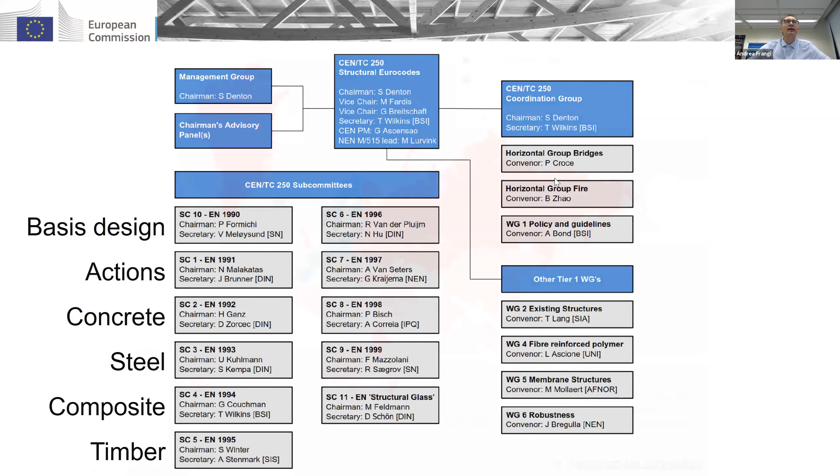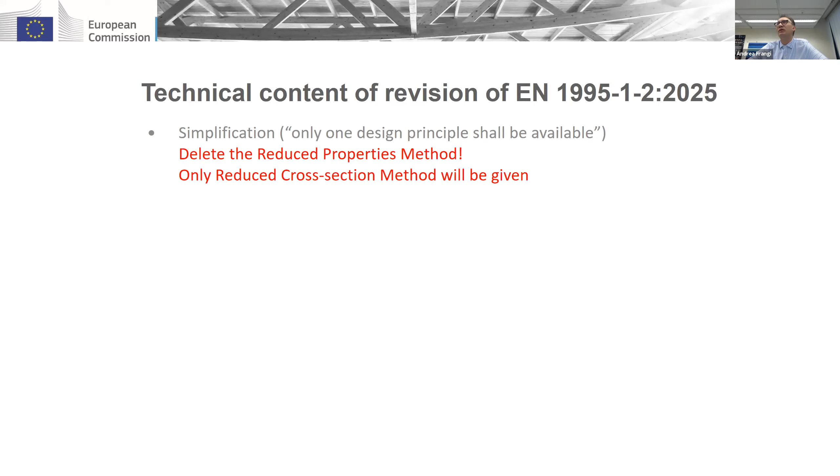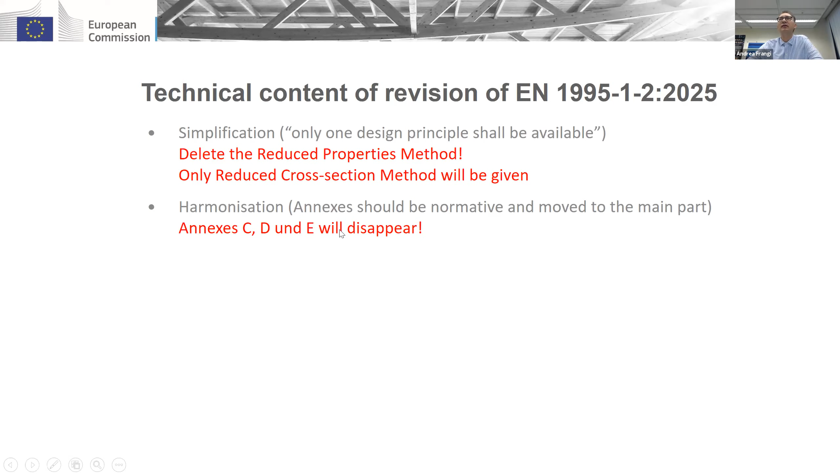Engineers are so good, they always find maybe a better model, but a standard should only give one model. And the best would be maybe a simple model so that you can design most of the building with this model. In the current Eurocode, we have also many annexes which are informative, and the goal was really to move them into the main part to make them normative.

And if you open the current Eurocode, you will not find anything about CLT, cross-laminated timber, or about timber-concrete composite. The part dedicated to connections does not have so many rules and needs improvement. Also for failure of claddings, there are no rules. For the separating function, there is an informative annex, but it actually cannot be used, it is more a black box, and most of the countries did not accept it. So we got a clear objective, and we tried to really improve the current Eurocode.

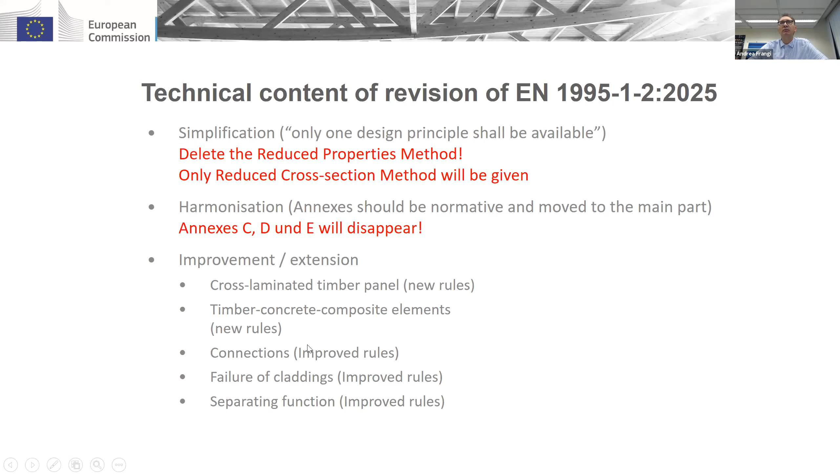Just to give you some numbers, when you write a standard, it takes time, because you have to go through different processes, preparing the different drafts, and the different drafts are discussed in the national bodies. You always get feedback, and you try to improve the text. So at the end, when we submitted the final draft, it was version 81 on my computer, so we produced 81 versions. And with 150 pages, more or less: 100 pages the main part, and 50 the annexes.

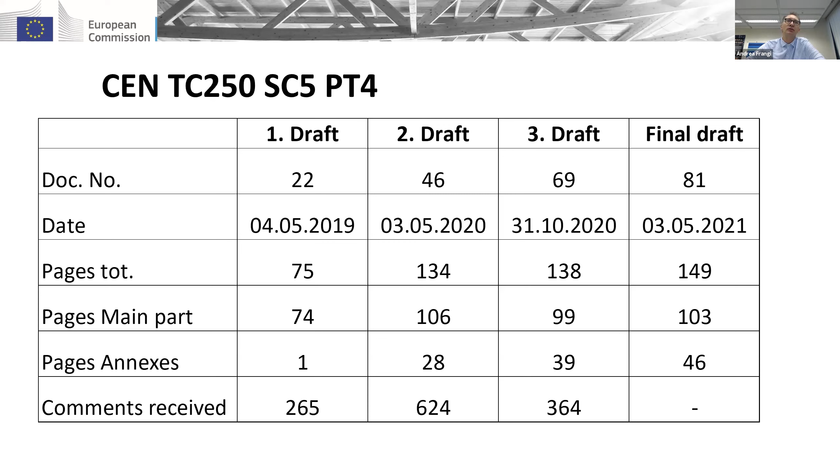And you see that during these years, we got many comments, and this is very important because the standard should reach all people, should be really useful for engineers, and we need consensus about what we have written. And consensus needs a lot of time for discussion and so on.

This slide shows you that the current Eurocode has only 50 pages, the new one has 100, the main part. And maybe you are disappointed because, again, oh my God, it's such a long document. But I have to say that we really tried to improve and also to fill some gaps. So we have more about mechanical resistance because we are now also covering more elements, for example, CLT and timber-concrete composite.

We have more about connections, and connections are very important in timber engineering. And you see also for the non-standard fire design, we have substantially increased the content because we now have more knowledge that can be interesting for engineers in practice.

The principle of this revision for all Eurocodes was stated in this way. We want, or we have, to introduce the current state of the art. And I'm also an academic, and we should always pay attention: the current state of the art is not the state of the research. I mean, in research we are always a step forward, but it does not mean that we have to immediately implement it in a standard. Maybe it takes some time.

Ease of use was the most important criterion. The engineer should be able to use this document. Avoiding parallel design methods, I already mentioned. Similar style between different Eurocodes. The Eurocode is a success story because it's a package, and if we write all Eurocodes in the same way, the engineer can work much better with these standards. And the motto was really evolution, not revolution. Of course, you might want to do tabula rasa, but it is important that the Eurocode evolves, avoiding revolution.

This is the table of contents. The first four chapters are really similar in all Eurocodes for the fire design of the different materials. So you always have the same, and for this chapter, at least the title is always the same, so that the engineer knows: tabulated data, chapter 6 in all Eurocodes. Sometimes basis of design is exactly the same wording in all Eurocodes because it's independent of the material. And then we have the specific part, in our case for timber, material properties.

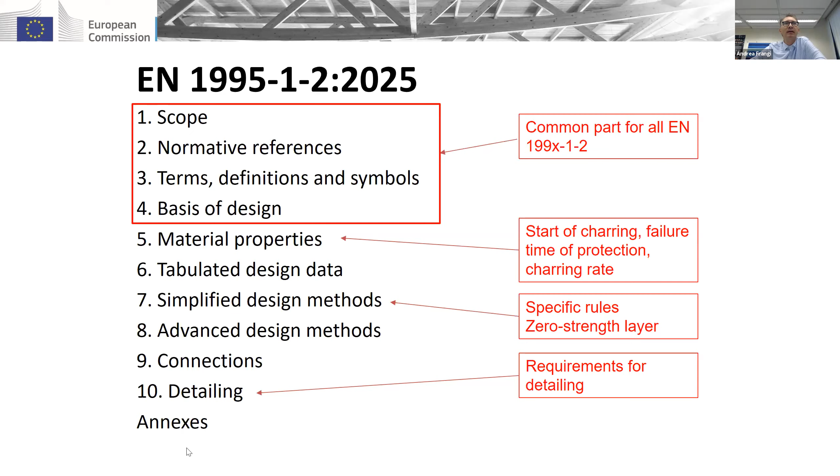I think it was a nice decision a few years ago in Horizontal Group Fire to decide to have these three levels of design in all Eurocodes, and the engineer will choose based on the project they are dealing with. Maybe it's no problem, I can do the design. I open the Eurocode, I take the value from a table, or I do a simple calculation, or sometimes I maybe have to really go for a more advanced one. And you will find in the new Eurocode information for all these design typologies.

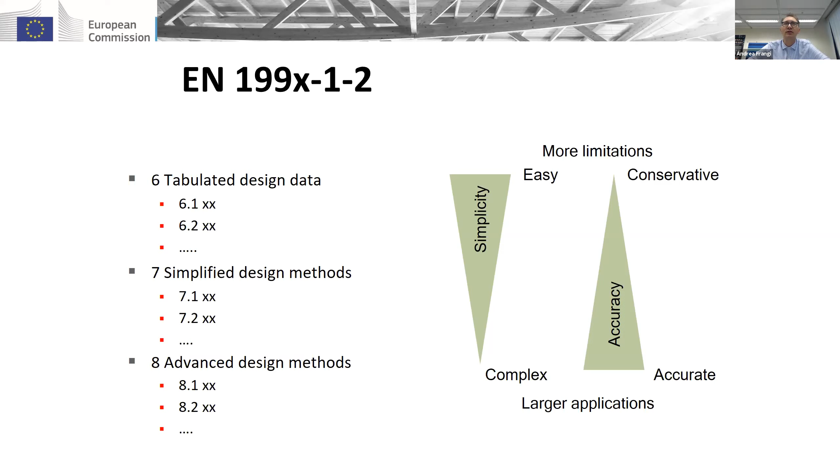And of course, when you are here at level one, it's easy. Sometimes it's conservative, but straightforward. And if you are here, of course, it's more complex, but you expect that you can maybe analyze a little more accurately, but maybe you also need a higher education, because then you maybe have to do a thermal analysis and a mechanical analysis in fire, and of course this is maybe not an easy task, but you will get information on all these design methods.

Annexes, 50 pages of annexes. Today, I will just give you a few information on A and B. We need these annexes just to be sure that you can really work with the document. For example, in the Eurocode, we distinguish bond line integrity maintained or not maintained. And the engineers have to know which model they should use. And we introduce a simple assessment method so that, actually, you will not do this work.

The company producing the adhesive has to do this test, and then they will declare bond line integrity, yes or no, and the engineer can use the right model. So this is, for example, an important annex. We need this annex so that we don't give only a question, but we give a closed package so that you can really work in the future.

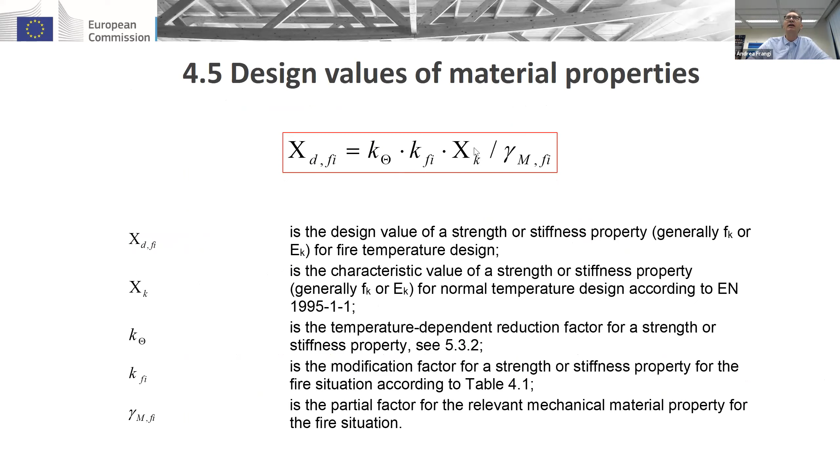Starting with material properties in the Eurocode, for all materials we always calculate the design value for strength and stiffness for the fire situation, starting from the characteristic value, and then we have some modification factors that I explain to you very quickly. We have this kfi value, which is a strange factor, but which allows us to go from the 5% fractile value to the 20% fractile value. It's something special that we have only in timber engineering, in fire design.

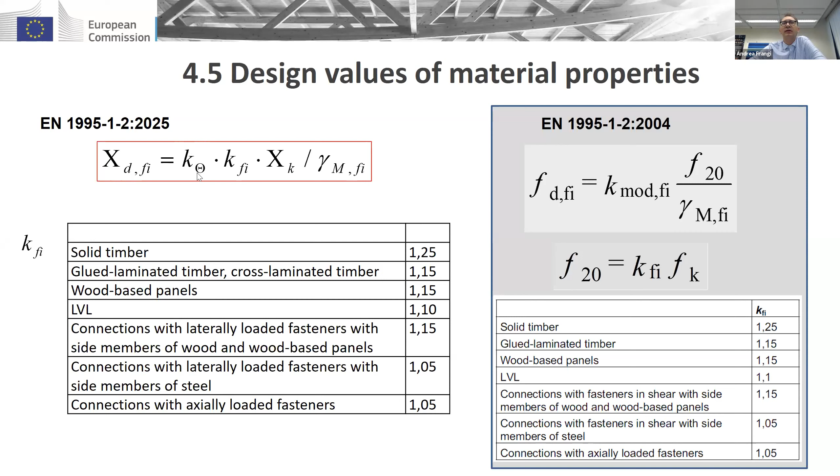It was also questioned because we don't have this 20% fractile value in concrete or steel. And based on the PhD of Reto Fahrni here at ETH, we now have a scientific basis to demonstrate that for the fire situation, for timber structures, we can go for a 20% fractile value based on a code calibration. The partial safety factor, gamma M, is equal for all materials to 1, so you can already forget it. And then the influence of the temperature is this k theta. With this, we consider the reduction of strength and stiffness when timber is exposed to high temperature.

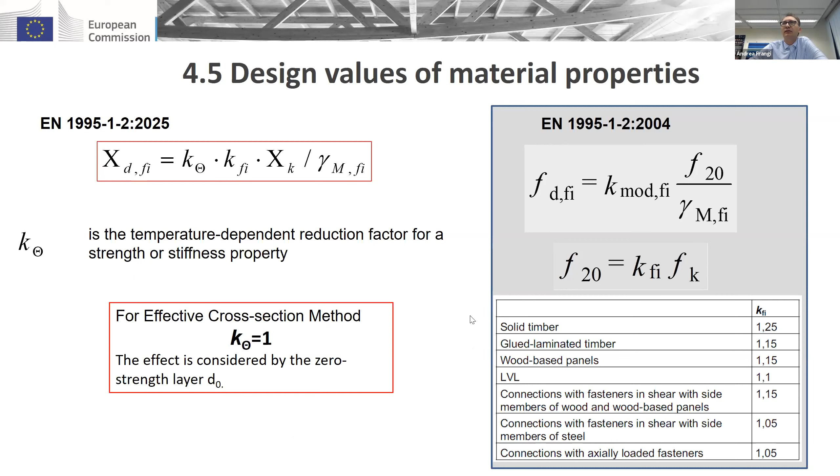Charring: in timber engineering, I really think the most important step is a good estimation of the residual cross-section during the fire. And in the Eurocode, we really try to have a good European charring model. We don't want to be arrogant, but we call it the European charring model because sometimes you take a piece from one code, then another equation from another code, and mixing codes you have to pay attention, because codes are calibrated and organized as a package. We want to say, use the Eurocode, but really stay in the Eurocode framework. Use the European charring model, which is something that you find in all countries.

You calculate the charring depth based on the charring rate times the time. In the European charring model, we assume a linear relationship, so the charring rate is constant, however, between different charring phases. So you have different charring phases to consider, and during these phases you can assume a constant charring rate. If you have a member which goes through different charring phases, you just go through them and calculate the charring depth in a very simple way.

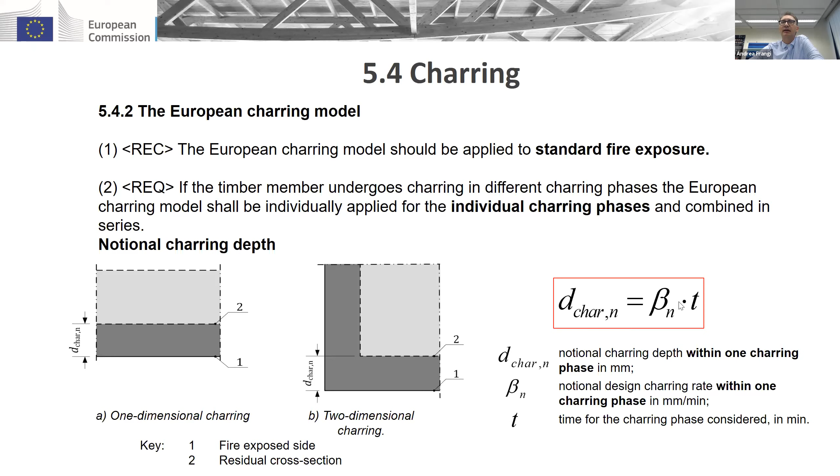You need this notional charring rate, beta n. This is maybe a little scary when you see this table. So many factors influence the charring rate. But these factors are already present in the current Eurocode, however spread through the document. What we have done is, in one table, show all influence parameters, explain the meaning, and give a clear reference: you get a value from this clause and so on. Starting from the basic charring rate, you have to consider the modification factors. You have the impression of so many factors, but at the end of the day most factors are equal to 1, and the calculation is not as complicated as it may seem when you see this table.

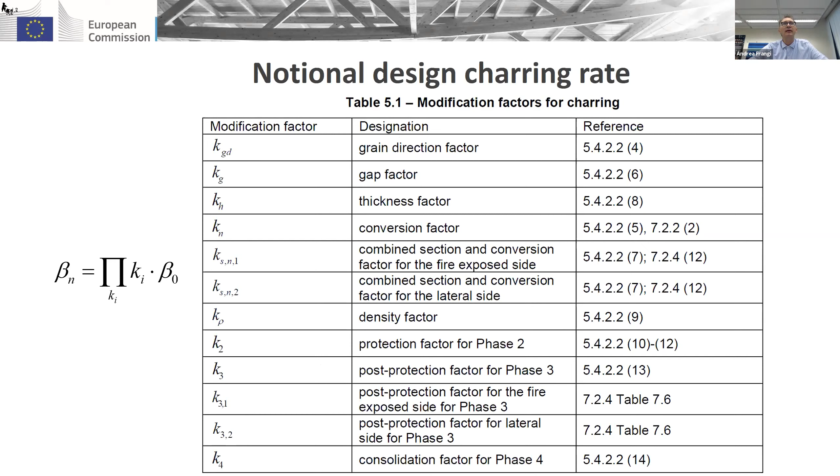The basic charring rate β0, so you need the β0 and then you consider the different modification factors. And the basic design charring rate is now also presented in a systematic way in this table. A few values for timber members, we distinguish between softwood and hardwood, and for panels. And you see the values range from 0.5 up to 1 millimeter. More or less, you have the same values in all standards.

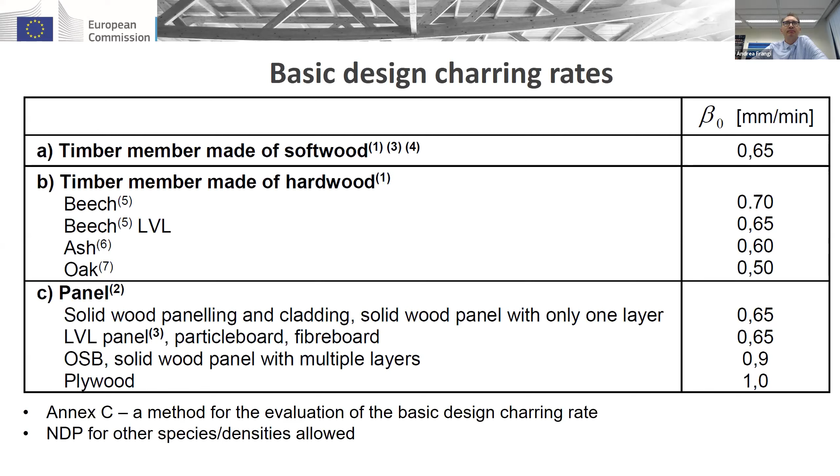And then, for example, when you now really go to the next step and you consider initially unprotected sides of timber members, you have this long equation, but as I already mentioned, at the end of the day, for linear members, solid timber, you end up with 0.8 and glulam 0.7. And this is exactly what we have today. Nothing new. And for plane members, you have, again, 0.65, or if you have gaps, you have a little higher charring rate.

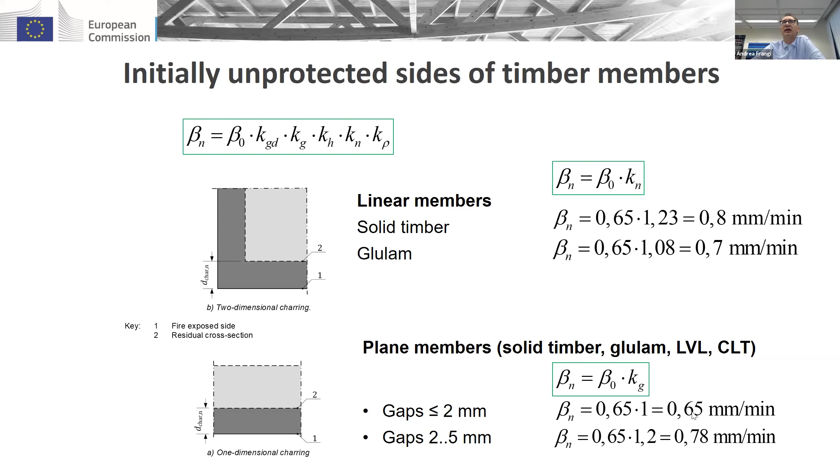This is for initially unprotected, and for initially protected sides of timber members, we really distinguish different charring phases. I think it's very nice, the systematic. I mean, I like the systematic that we have in Eurocode. We distinguish the so-called encapsulated phase, protected charring phase, post-protected charring phase, consolidated charring phase. We also give a number, phase 0, 1, 2, 3, and 4. And in the document, we always refer to phase 3, to phase 2, and so on.

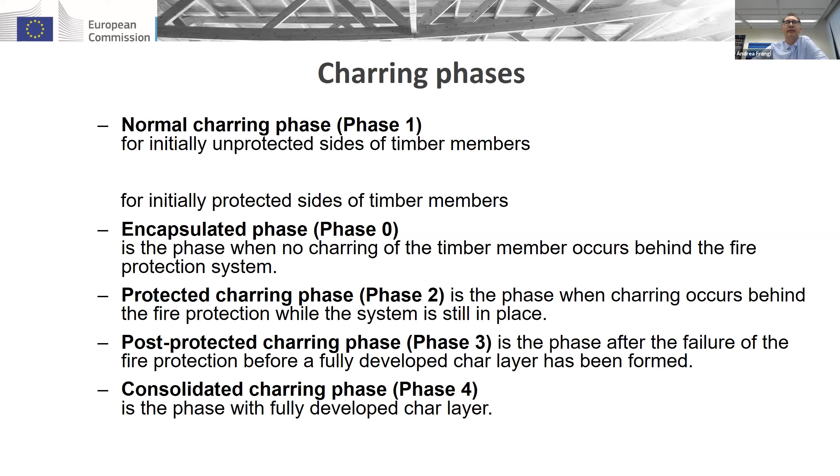And we have really refined all figures, because we think the figures are so important, and people, of course, look at the figures. You see that we have different figures for the different situations. Initially unprotected, here initially protected with different situations. The protected phase, the consolidated phase, the protected phase, the post-protected phase, the consolidated phase.

And you see that during each charring phase, you have a constant charring rate, but the charring rate is different. And for example, from phase 3, when the fire protection system falls off, you have an increased charring rate, which is exactly twice the value that you have during the normal charring phase. And again, it's just a question of using the document. We think that it's pretty easy to distinguish the different charring phases and to calculate the residual cross-section.

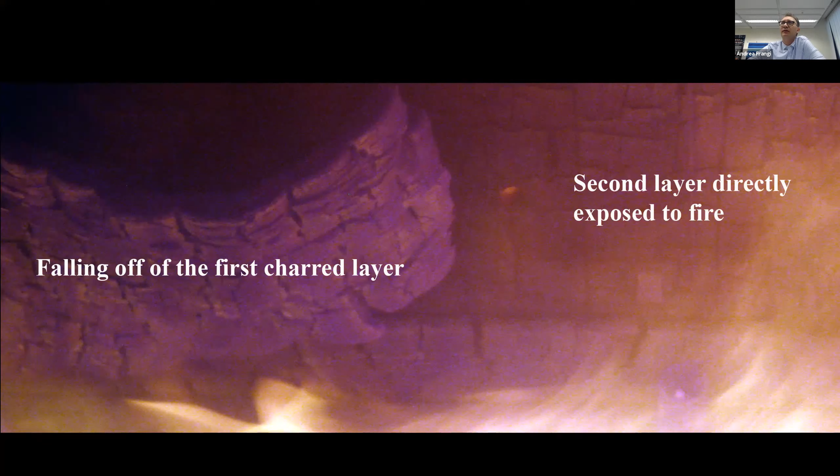What we have introduced is, of course, the topic of falling off of the char layer, debonding, delamination. There are so many words for this phenomenon that we discovered maybe 15 years ago. Sometimes there are things that we do not understand exactly, but we know that this can happen. And now we have really two different models: what we call bond line integrity maintained, as I showed previously. And if you know that the bond line integrity is not maintained, meaning that you expect this falling off of the char layer, you use this kind of calculation, which is similar to the previous, but you have the different charring phases within one layer.

So if you look at this figure, this is for protected CLT, for example, then you have the start of charring. This is the protected phase, the failure of the fire protection system. You have the increased charring rate, then, when you have enough charcoal, consolidated, and here you now reach the first bond line with the char layer. And at this moment, we assume falling off, and you start again: increased charring rate, consolidated, increased, consolidated.

Maybe some of you have already seen this in many publications. We call it the step model, because you have increased, then normal charring rate. And we give this in a really systematic way. The only thing the engineer should know at the end of the day is which model to use, the previous or this one. And for this, we give Annex B to assess the bonding.

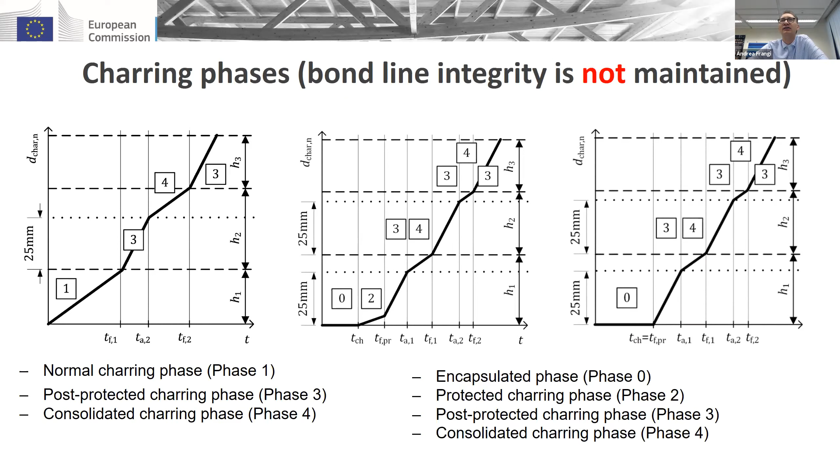For these different phases, you have the different factors. This is the protected phase, so we have a reduced charring rate. You can calculate it for the different fire protection systems with this simple equation as a function of the thickness of the panel. In the so-called post-protected charring phase, when timber is exposed to high temperature, you don't have the charcoal protecting the timber. We have the increased charring rate, you see the factor 2, and then when you have enough charcoal, you can go back to the normal charring rate, and the factor is equal to 1.

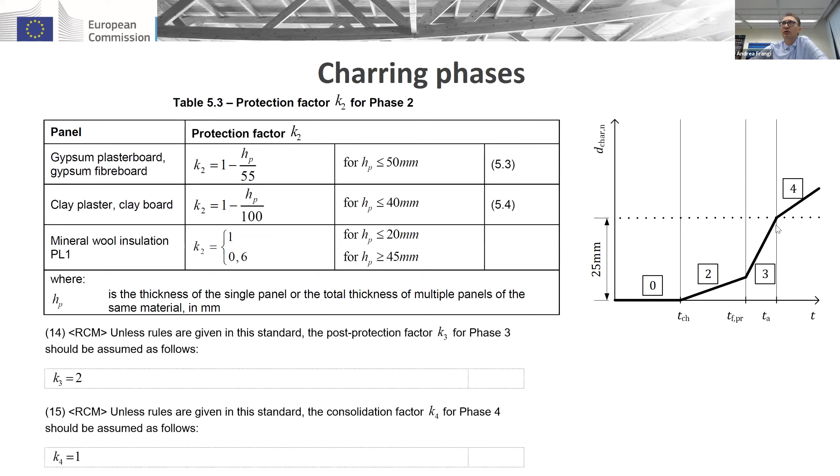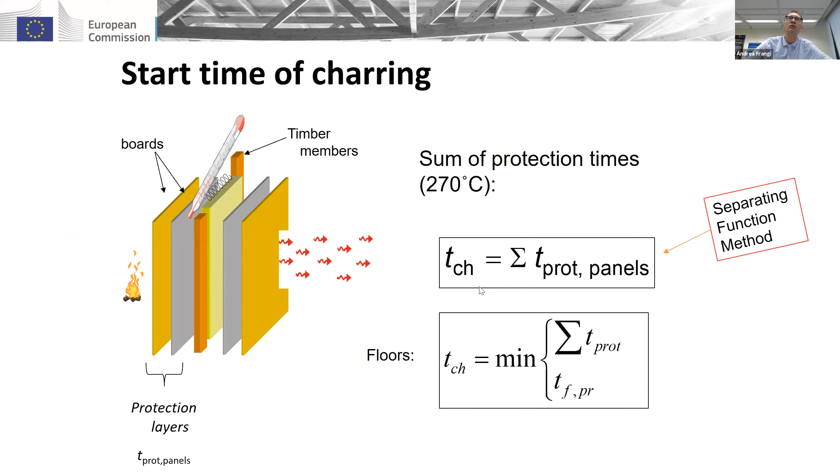Now you need this value, start of charring, the failure time of your protection system, when you go back to the normal charring rate, tch, tf,pr, ta, and for the calculation of the start of charring, you go back to the separating function method. So we have the link between the effective cross-section method and the separating function method, and you are able to calculate the start of charring with, again, a relatively simple equation. This was already included in the current Eurocode, but now we have the link between the two methods.

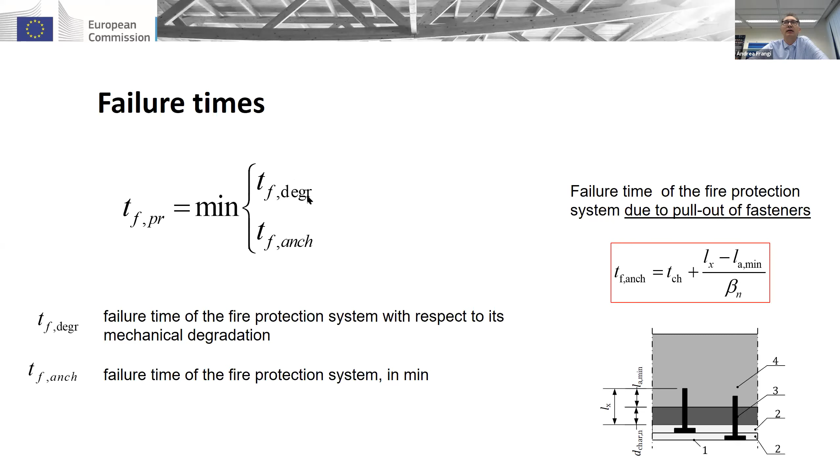Now, the most important value is the failure time of your fire protection system, which is absolutely not so easy to calculate. Usually you do some tests and/or the producer gives you this value. We know that the failure can be due to a failure of the fastener, but this can be avoided if you have enough penetration of your fastener. We give some rules so that in the end the failure should be due to the mechanical degradation of the material. And I think this is a huge improvement.

We have a huge database from the last 20 years, so much testing, collecting data, evaluating all this data. We give some generic equations based on the 20% fractile value for the different typical fire protection systems using gypsum plasterboard, gypsum fiberboard, 1 layer, 2 layers, and so on. For vertical position, walls, and horizontal position, floors, you have all these equations. If you know the thickness of your layer, you can estimate the failure time.

Of course, a company may say, my product is better; they can do the test and always declare a better value. This is the reason we decided to stay at the 20% fractile value, because you can at least do a calculation, and later on, if you know the product is produced by this company, you can maybe have a better value. But I think this way we also fill an important gap.

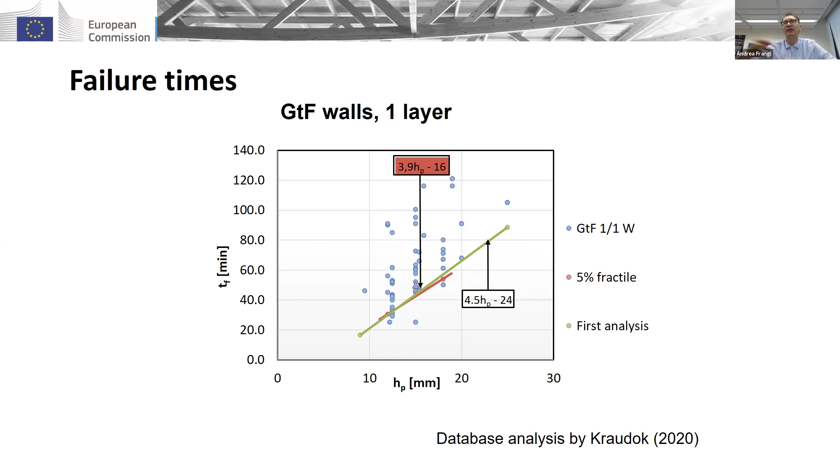Here is an example to show you the scatter of values. You have products on the market which are produced according to European standards, but they don't always give the same value. We have a scatter that we have to consider in this generic equation, and we do it just by best fitting at the 5% fractile value. I skip this. It's an easy equation to calculate also when you go back to the normal charring rate.

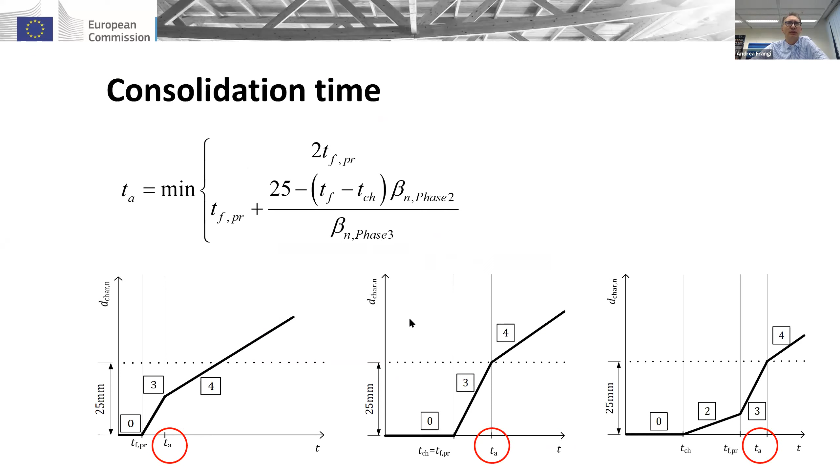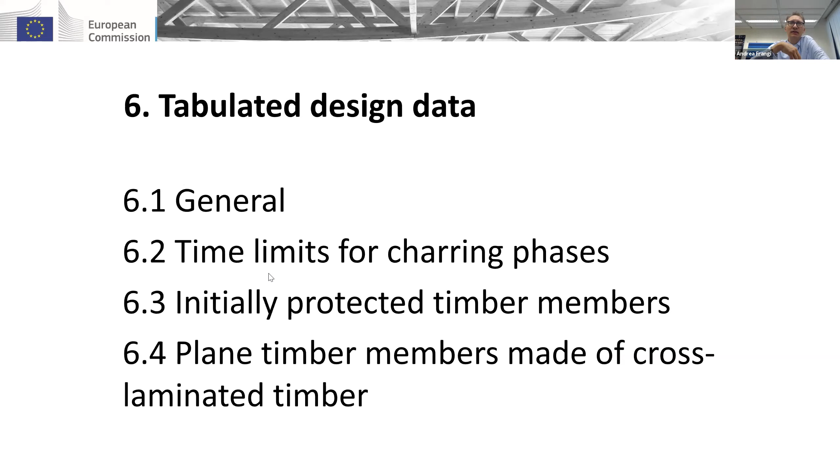Now, tabulated data: as I already mentioned, we also include tabulated data, and this should really help the engineer, because to find the start time of charring you have to do some calculation. We decided to give data so that you don't have to calculate, for example the start time of charring and the failure time of the fire protection system. We know, at least in Europe, the typical combinations for fire protection systems, gypsum plasterboard type A, type F, or gypsum fiberboard, 1 layer, 2 layers, the typical thickness. And we have already calculated them for you. You pick up the table and you have the start time of charring, the failure time, and your important values to do the design.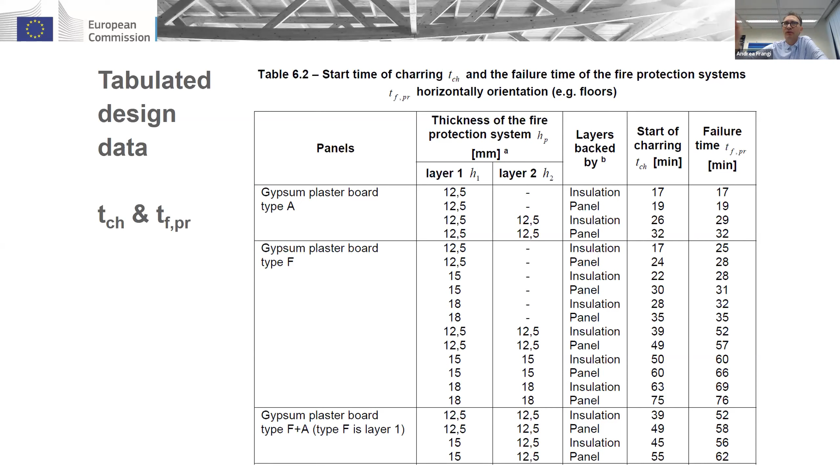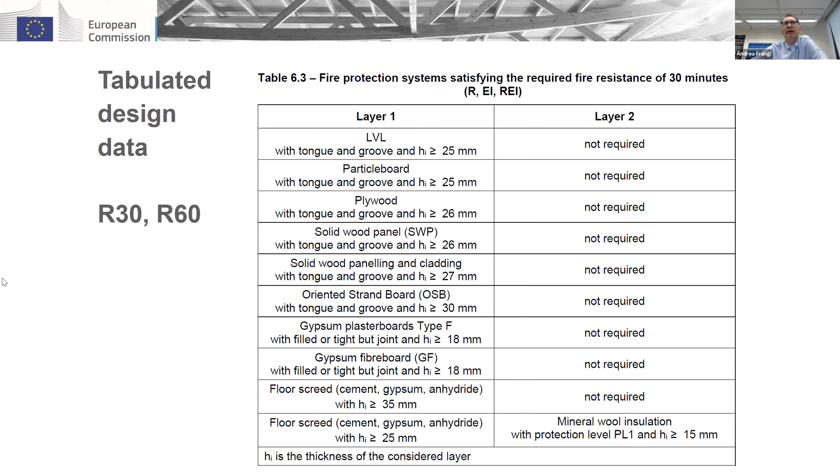Or, for example, based on testing, we know that if you have this thickness, you have 30 minutes fire resistance, 60 minutes fire resistance, under ISO standard fire exposure, and so on. We also give this kind of table, so that if you have a solid wood panel of 26 millimeter thickness, you already have half an hour fire resistance based on standard fire exposure. This should help a little for normal cases to do the design in a fast way.

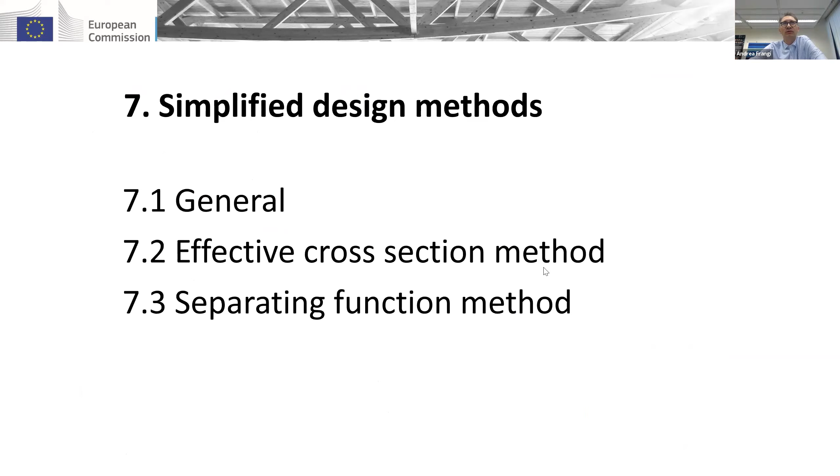Then, of course, chapter 7 is also a very important chapter, the simplified design methods, which you probably use in most cases, with the effective cross-section and the separating function method. The effective cross-section method is something most of you know. We calculate the char depth, we add the zero strength layer, and we get the effective cross-section, and by adding the zero strength layer we assume that we can use the material properties for the effective cross-section as at normal temperature. Engineers do a bending verification as they do at normal temperature, assuming, however, an effective cross-section.

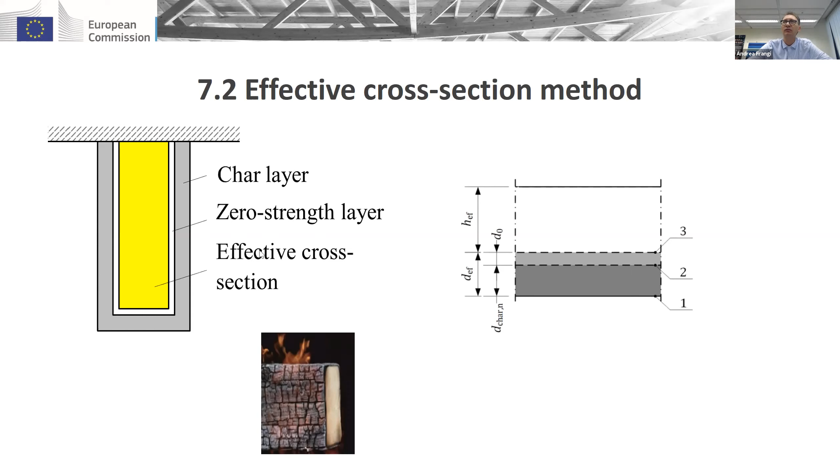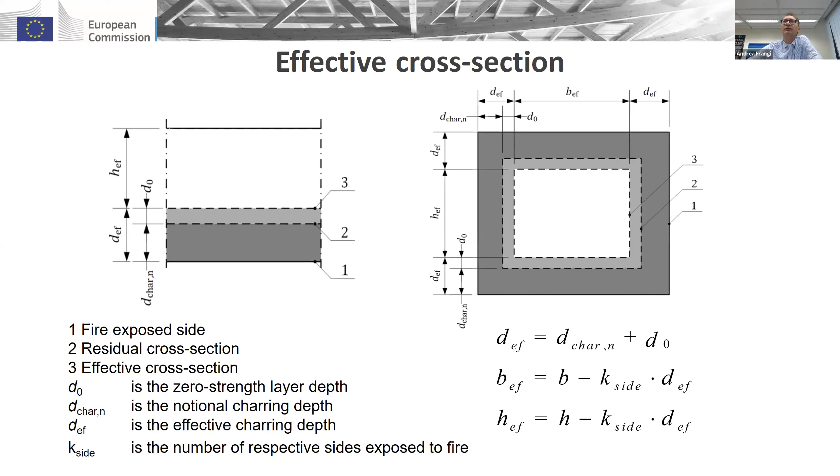This is, of course, one-dimensional, more dimensional: calculating the char, adding the zero strength layer, getting the effective cross-section. But of course, you will do this calculation now for the different charring phases, assuming a constant charring rate.

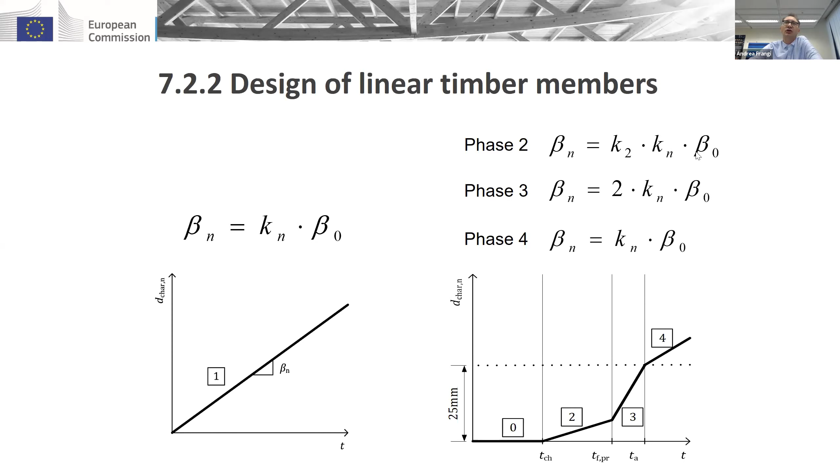And if you go really to the linear timber members, meaning columns and beams, then the equations at the end are very simple. So this is for the initially unprotected, this is for the initially protected, with phases 0, 2, 3, and 4. And here you see the equation for the calculation of the notional charring rate, with the factor 2 for phase 3, no factor for phase 4. Here you can reduce the charring rate, and you have all these simple equations.

Then this is the long story about the zero strength layer, because, as you may know, we are using the magic number 7 millimeters in Eurocode. We are also abusing this number; we are using it for all kinds of situations, even though we know that the 7 millimeters was established many years ago by Schaffer and so on, and this was for bending. I mean, there is the full story.

And we know from the last, I have to say now, 15 years, that 7 millimeters is not very conservative. It's actually non-conservative, especially if you have a member under compression, and we increase the value up to 14 millimeters for compression, and for bending we can use a lower value in the range of 10 millimeters. Of course, many engineers are disappointed, but in most cases there is no consequence. Also, if you have designed buildings in the past with 7, you will not demolish and rebuild.

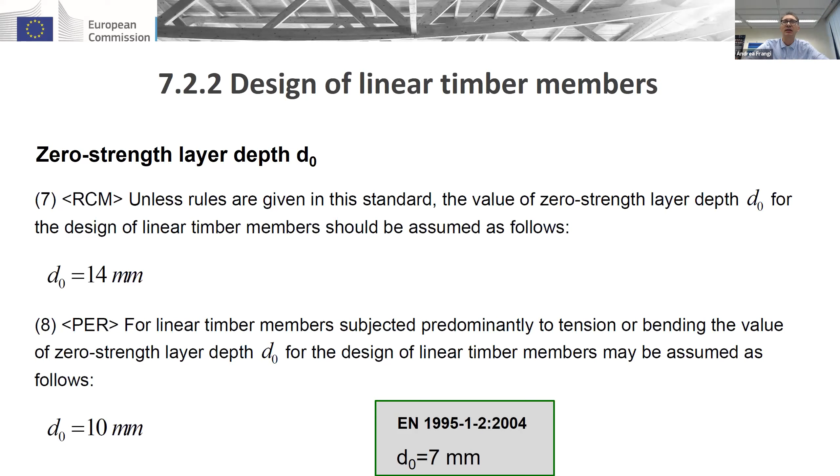But it's also our duty after 20 years to go through the current model in a critical way. And if we think we have to adjust the value also in the other direction, meaning increasing, we have to do it. This is our duty, and we have done this.

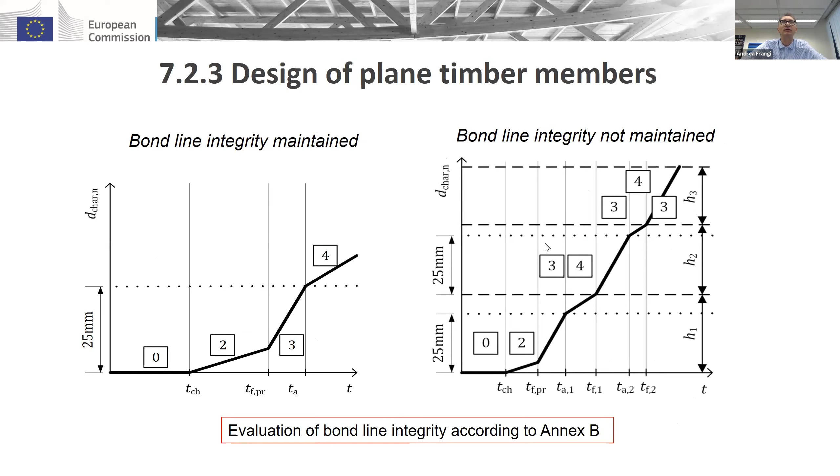And then, of course, I can do this very quickly. You distinguish bond line integrity maintained from the case of bond line integrity non-maintained, with the stepped model for the different layers. And this is usually used for CLT, when you expect this falling off of the charred layer. The zero strength layer is easy to calculate, usually a function of the thickness of the member. Here is the table for solid wood, glulam, and LVL.

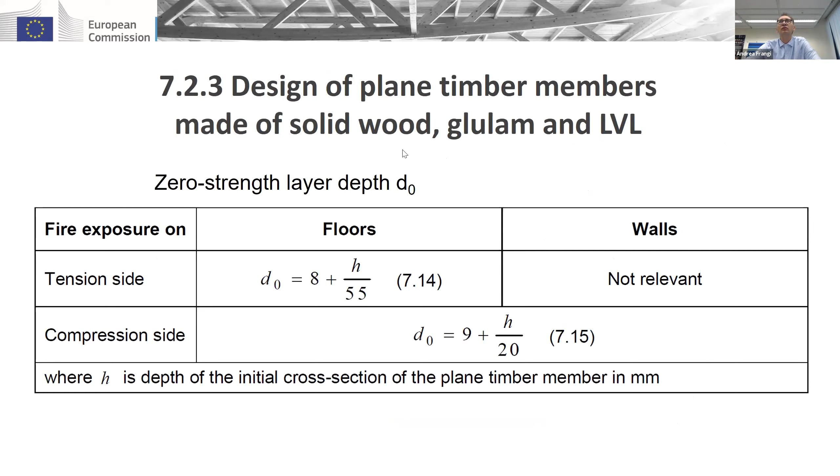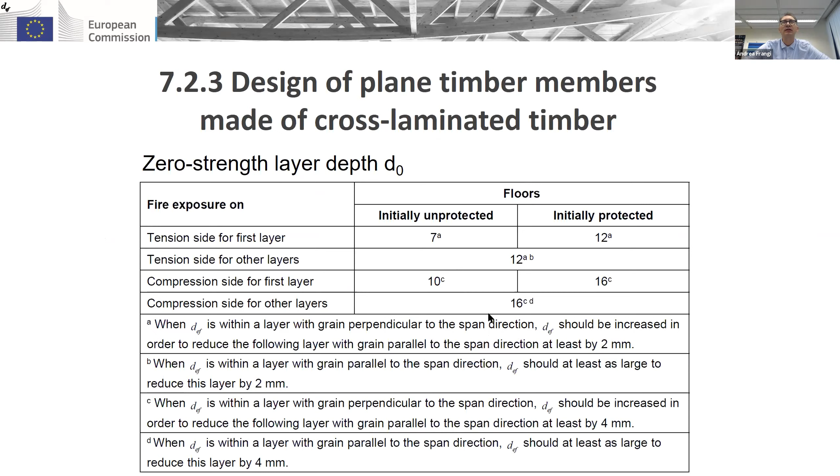And for CLT, again, CLT is a nice product, but it's a little more complicated due to the longitudinal and transversal layers. We give a separate table for floors. But if you look at the values, just the order of magnitude, we go from 7 to 16 millimeters for the zero strength layer for CLT, for floors in this case, and then you will find the table for the walls.

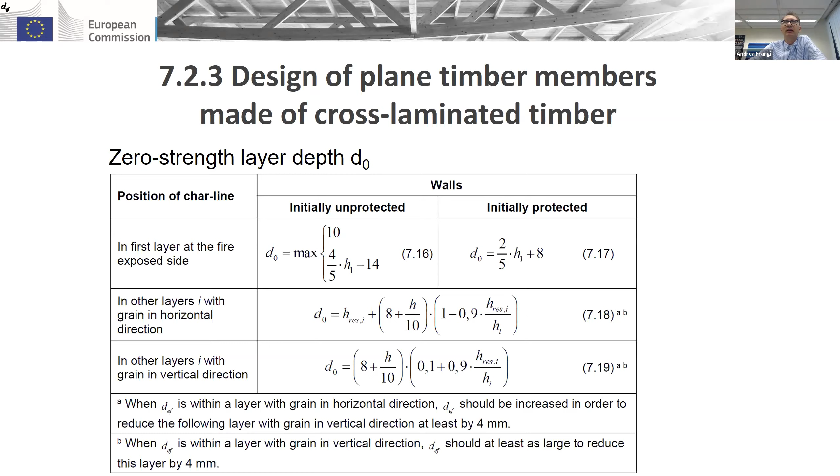The calculation is something you have to do the first time. This is the reason we have also introduced the tabulated data, because, you know, the first time you open it and start the calculation, you have to understand the model. But there will also be, as I mentioned, a background document, and there are already many publications showing the background for the calculation of CLT.

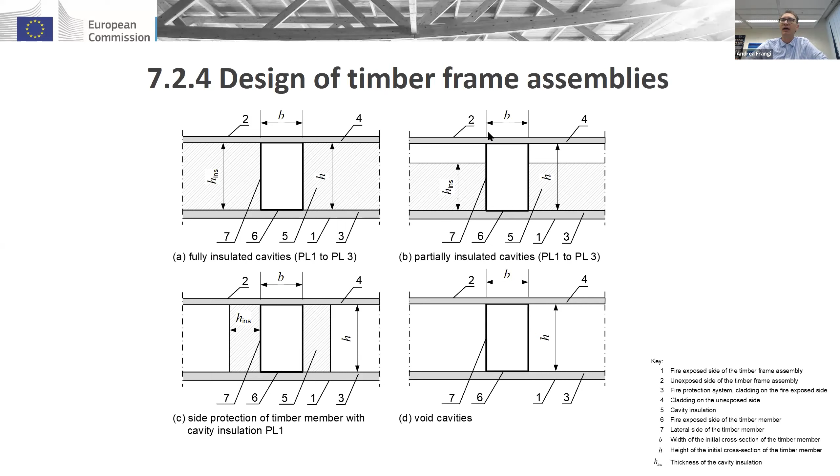Timber frame assemblies, so joists, studs, and then panels: we extend, we are really able to cover the fully insulated cavity, the partially insulated cavity, the void cavity, or when you have the insulation only on the side of the member. So you can design all situations with the new Eurocode. And you can consider all insulation. So this is again a huge improvement. At the moment, you can only consider stone wool. In the future, you can consider any kind of insulation.

But of course, we know that insulations show different material behavior, and we distinguish 3 different protection levels, PL1, 2, and 3. PL1, let's say, is the best performance, typically stone wool. And in PL3 you see the insulations that start disappearing already at a low temperature. And again, the question is, what is the performance?

We already give this table, so that you know which model you have to use with PL1, 2, and 3. But if a producer says, oh, sorry, I disagree, my insulation is much better, they can again go to Annex B, do a test, and demonstrate that the insulation performs in a better way.

When you have stone wool, the best protection level, we really assume no charring from the lateral side. We have the zero strength layer on 3 sides, but otherwise there is charring only from below, because we assume stone wool is able to protect the member from the lateral side. And there are the equations. We give the zero strength layer, again, usually just as a function of the geometry of the member.

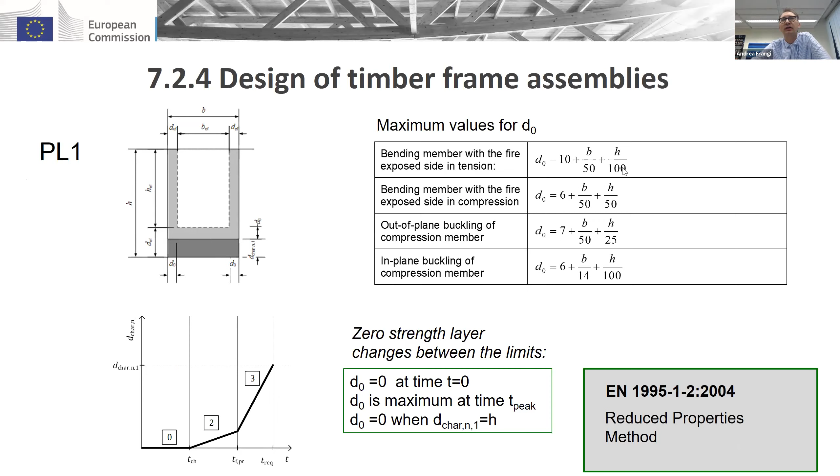And then we have also the figure showing what happens with protection level 2 and 3 and for void cavity. What happens is that you have to assume also charring from the lateral side, not only from, let's say, below. And here we give also when you have to consider it. So there is a moment where the lateral side is also exposed to fire, and then you have to consider the charring from the lateral side.

It depends on the so-called recession speed of the insulation, how the insulation reacts. We have this value now for glass wool, for wood fiber, for cellulose. So we can really consider also this kind of insulation, which I think is good because any kind of insulation has maybe the right application, and you can consider it also for the fire situation.

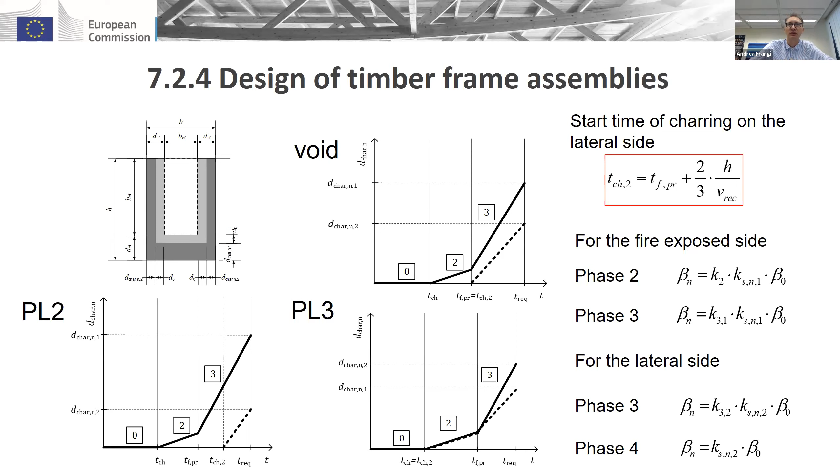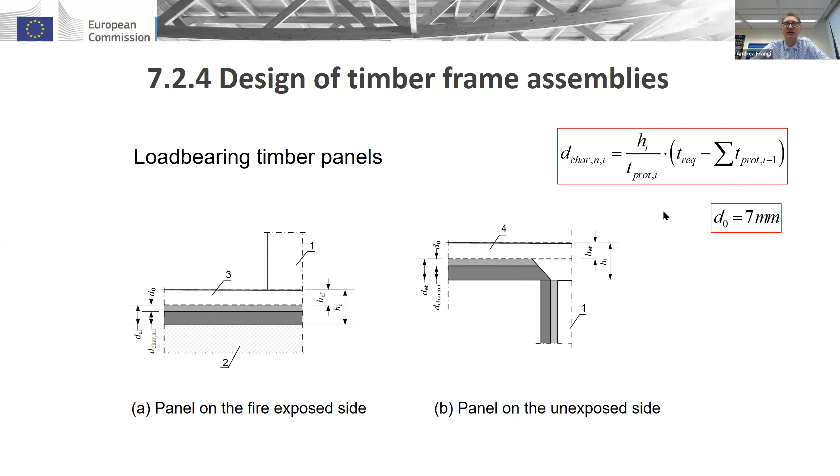Of course, you have to design sometimes also the timber panel of a timber frame assembly. If they are load bearing, there are enough rules. And here, at least for this, we go back to our magic number: 7 millimeters is still okay for this calculation.

Separating function: I think this is very nice, that you can verify EI criteria without doing tests. You really can calculate any kind of walls and floors with the separating function method, which is an additive method. So you calculate the contribution of the different layers. This is based on a PhD done many years ago here by Vanessa Schleifer, in 2009. This method has been used now for 10, 11 years in most European countries, and we know that it's working. We have good experience. There are no tests showing that the model gives completely wrong results.

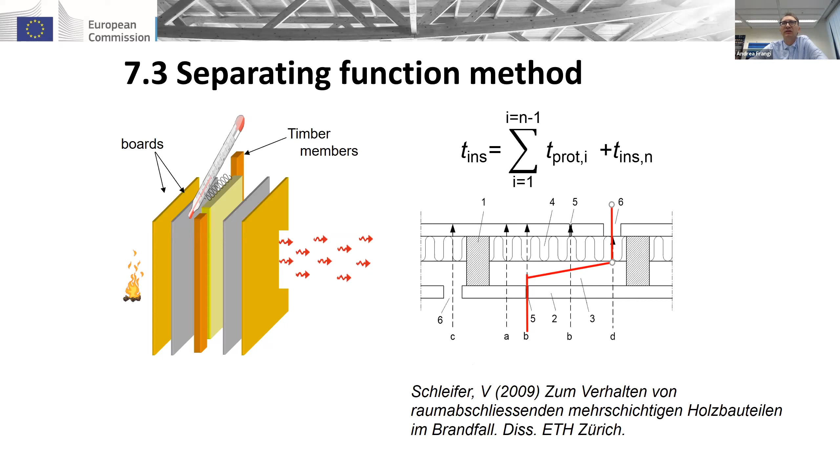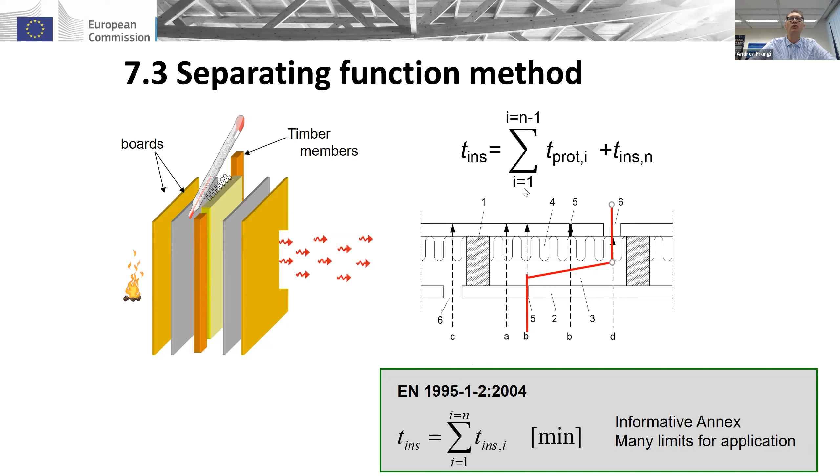So you calculate the protection time for the different layers, and the sum is just your fire resistance of the floor or of the wall. And of course, you have a so-called basic protection time, and then you consider also the position of the layer, because if it is exposed from the beginning, it behaves in a different way. If the layer is in position number 3 and it is exposed to fire later on, then it will also burn faster and so on. So we consider this with the position coefficient for the exposed and unexposed side.

And then we have this maybe strange delta T, which is really a bonus for a fire protection system which stays longer, so that it doesn't fall off immediately when you reach about 300 degrees behind the fire protection system, but protects the next layer longer, which is good. And we really want to consider this with the delta T additional time. And we have now, again, equations which are not so complicated. Even if you look at the equation and think, what does it mean? When you start working with the model, it is pretty easy to calculate this delta T.

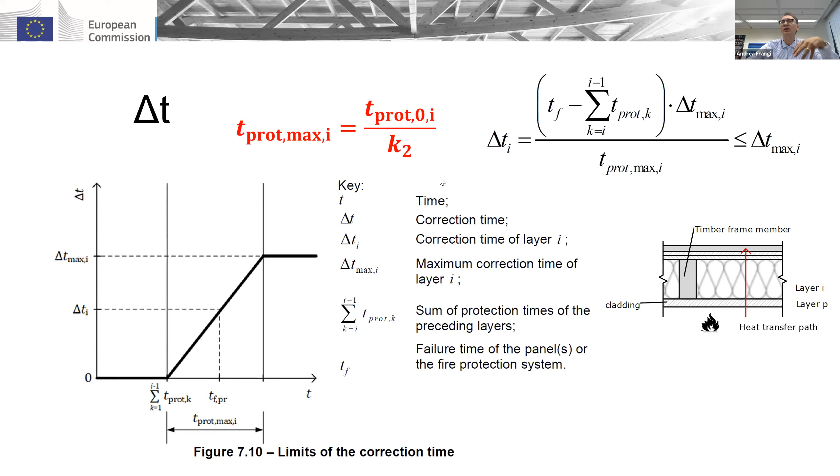And this is now done in a systematic way, so that you will understand the physical idea behind this delta T. And the good thing is that we have more or less the values for, I cannot say all materials, but most of the materials that you use at the moment, so that you can really verify EI criteria for most of the walls and floors that we are using.

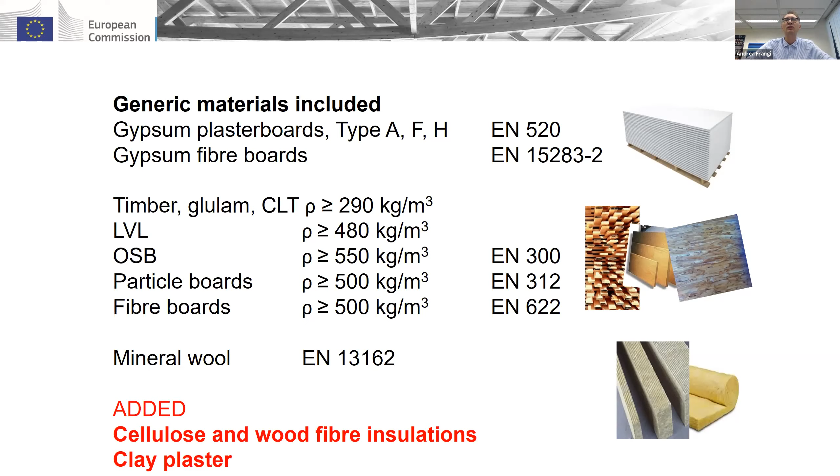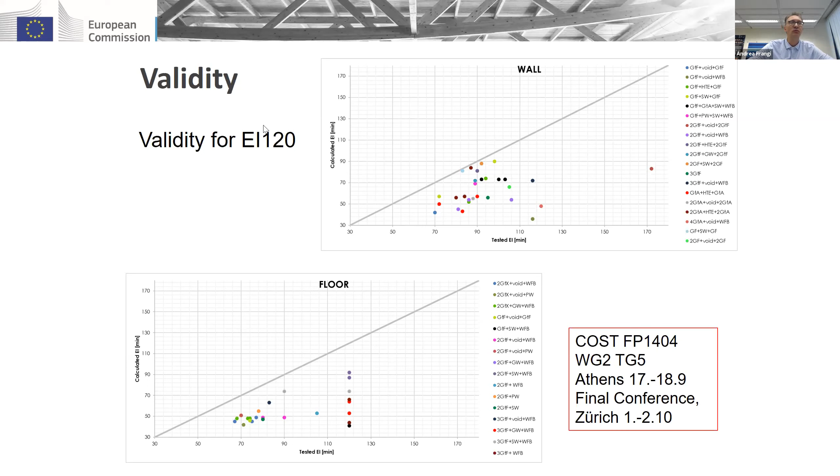Of course, you have to fulfill also detailing. So maybe one question will be, yes, but this is more a checking of the thermal insulation. What about the integrity? The integrity is covered by respecting the detailing, because you know that fastening is also very important for this falling off. So you have to fulfill some criteria with regard to detailing. We were able, based on many tests, to extend up to 2 hours. So we are really extending the calculation model for a longer fire exposure. So we go from 60 minutes to 2 hours.

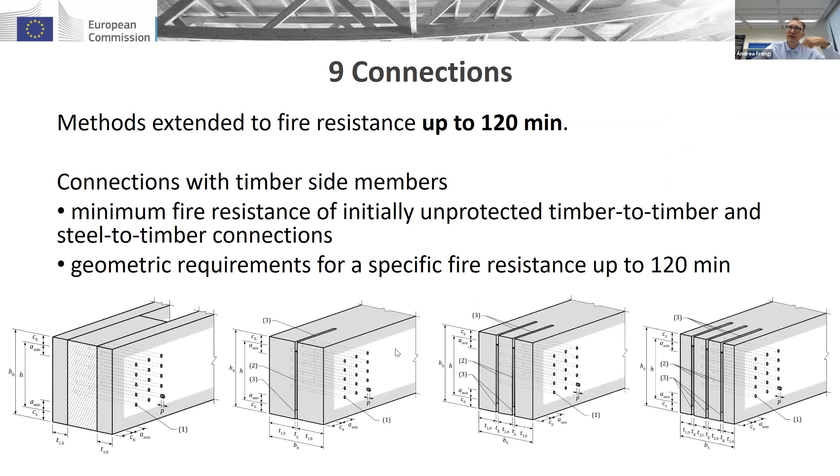Connections: there are no timber buildings without connections. Again, here we have the first improvement. We are able to extend the calculation up to 2 hours. We have enough experimental data. And we have 3 levels of calculation. There are simple tables. You get a minimal fire resistance, but usually this is in the range of 15 minutes, so not interesting. And then the next level that we have introduced is just checking the geometry of your member. So we give, for example, here, a steel to timber connection with 2 slotted steel plates.

We give here the timber cover, this T1, and this the thickness of the timber side member here. And we see, okay, for 30 minutes, you need maybe 50 millimeters. If you need 2 hours, you need more timber, 140 millimeters. So you are not doing any calculation, you just check that you have enough timber around your connection. It's like tabulated data, but this is included in chapter 9.

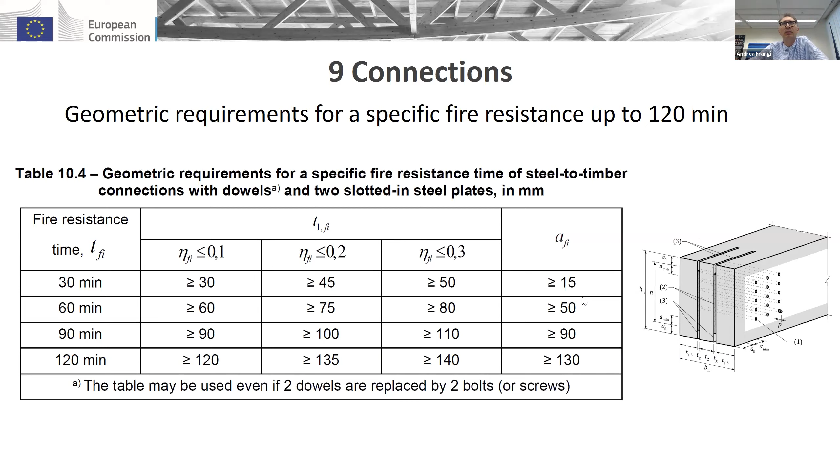And we have done this in a systematic way for typical connections, a timber-timber connection, steel-to-timber connection with slotted-in steel plates. Then, of course, you can also calculate for any kind of connection. This is already included in the current Eurocode, but this was improved based on many test data, the so-called exponential reduction method. So the load carrying capacity is a function of the time, and during the fire exposure, you lose some resistance or load carrying capacity. This is approximated with an exponential function.

And now we have better data so that we can design connections with nails and screws, and especially for dowels and bolts. We have now an improved design model which allows us to go up to 2 hours. You have, however, also the possibility to protect. So we give also a rule. You can also have longer fire resistance by protecting the connection, or, as I mentioned, by increasing the dimension. So you will find these two strategies. You can design for half hour and then protect. You can design for half hour and increase the dimension to get maybe 60 minutes, 90 minutes, 120 minutes.

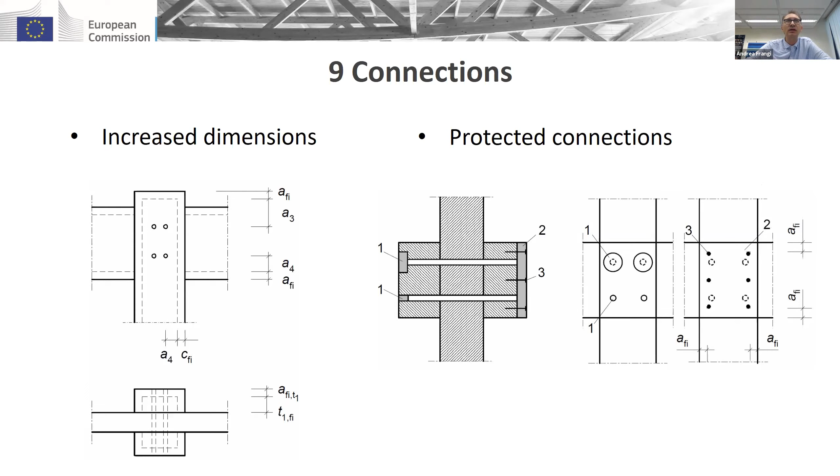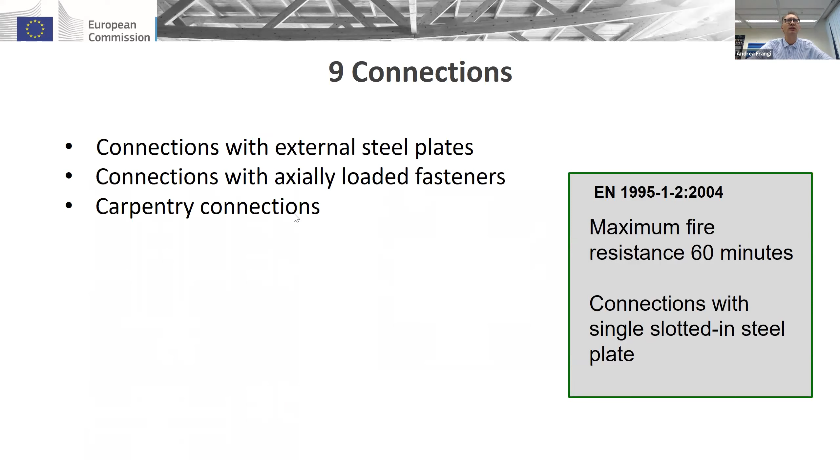Then there is also some information for external steel plates, axially loaded fasteners, and also carpentry connections are covered in the future Eurocode. Detailing, very quickly, is of course very important, and we extended it. The current Eurocode has 2 pages. Now we have 7, because it's also very important to describe how you have to fix the panel, how you have to deal with penetrations, with openings, with joints. You know that the fire is going through these weak points. So we try to give advice, rules. Most of these rules are permissions because maybe there is a better solution, but at least we give some information, and especially in order to use the previous modeling, it's important that you respect them.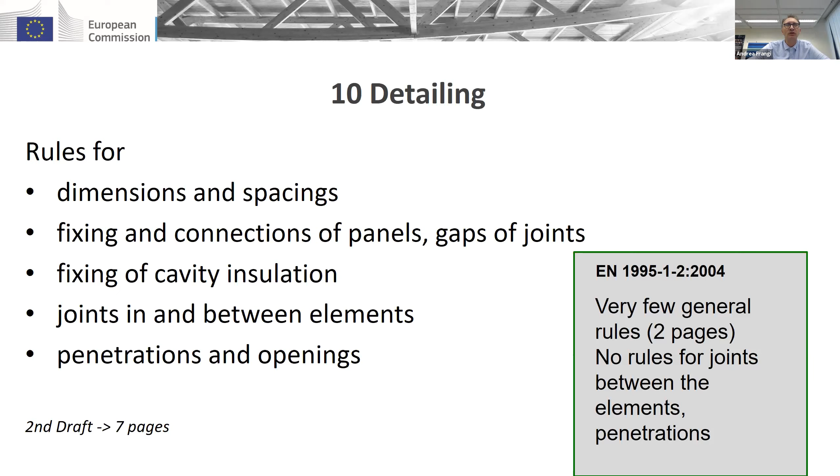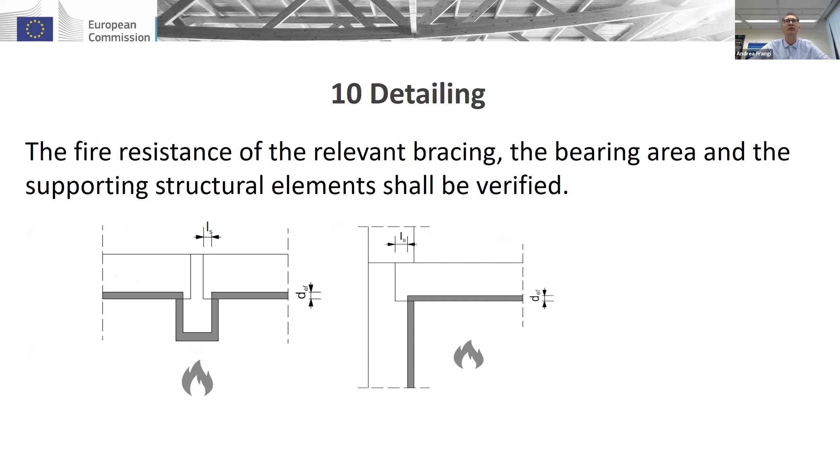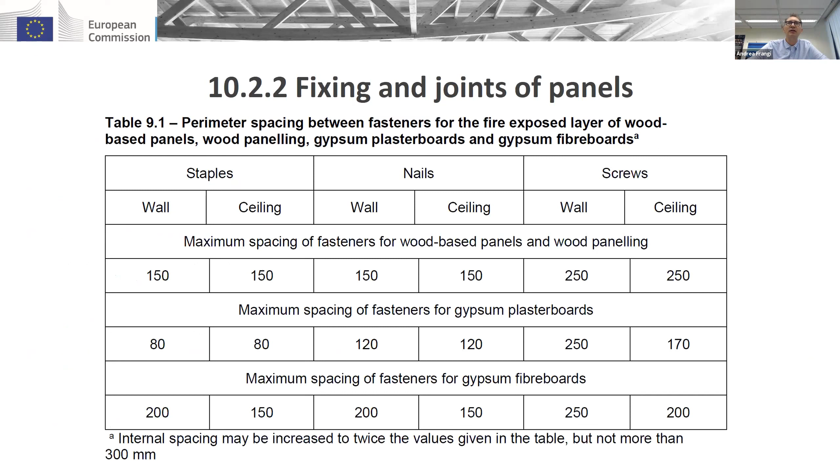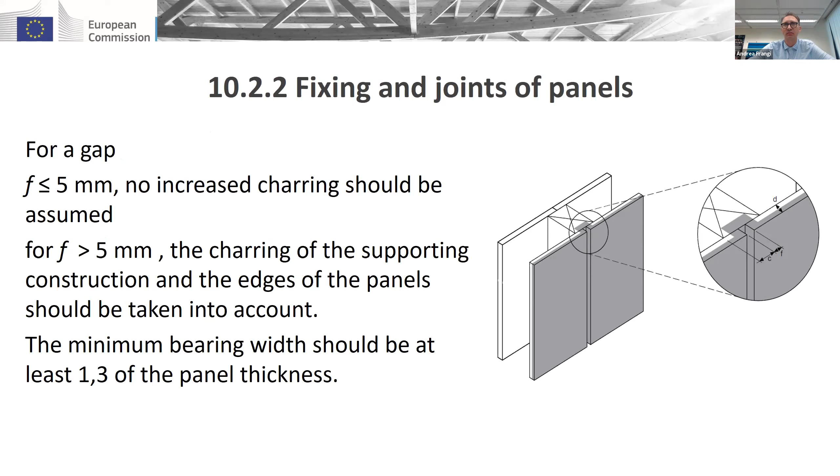So you will find also some information about the supporting area that you have to check, of course, so that your member will not start falling down. You have this kind of table giving you the spacing for the fasteners, for panels, based again on experience, on fire testing, about joints, how you have to deal with a joint, and maybe this joint is 4 millimeters and so on. We give some rule: up to 5 millimeters, we say forget it, nothing happens. If you have, however, big joints, then you have to assume 2-dimensional charring. So you will find additional information to really be able to look at the detailing, which is very important for the fire situation.

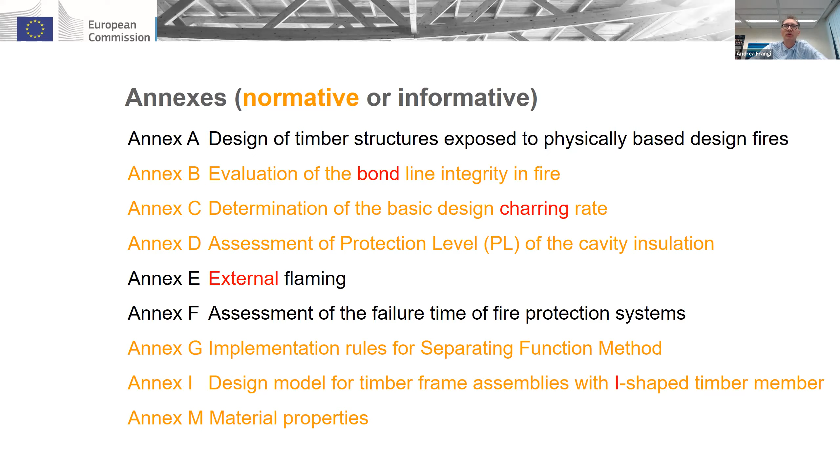And finally, the annexes. Now, maybe you are disappointed because the main part, of course, is dedicated to ISO standard fire exposure. We will probably design most buildings according to ISO standard fire exposure, but we know that authorities will ask you in the future also for a performance-based design. And this is now all included in Annex A, design of timber structures exposed to physically based design fires. We have really extended, improved, rewritten completely Annex A. We cannot say that we already have a perfect solution, but I think we are now giving a framework for engineers. Of course, this is already for well-educated engineers when you go to a performance-based design, to consider timber in the building, and what happens when you have timber exposed to the fire.

This is a huge discussion about fire dynamics, tall buildings, and so on. You will now find some simple equations for how you can consider the contribution of timber during the fire. Of course, we looked at the knowledge that we have on this. This is already the state of the research, and this is the reason that we decided to declare this annex informative, just because we assume it will be improved also in the future, and the national bodies can maybe also adjust it a little.

We have considered especially knowledge coming from latest work in Europe by Norman Werther, Joachim Schmid, by Colleen Wade, and so on. And what we recognize in the last year is really that we always focus on timber, charring timber, but for the fire dynamics, more important is the char layer, which can be considered like a battery, which is able to store the energy when you convert timber to char, but which is also able to release this energy later on, maybe in the cooling phase and so on.

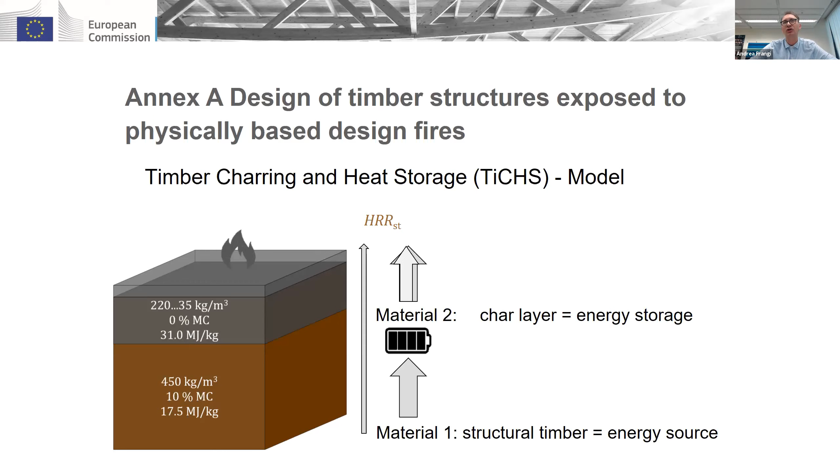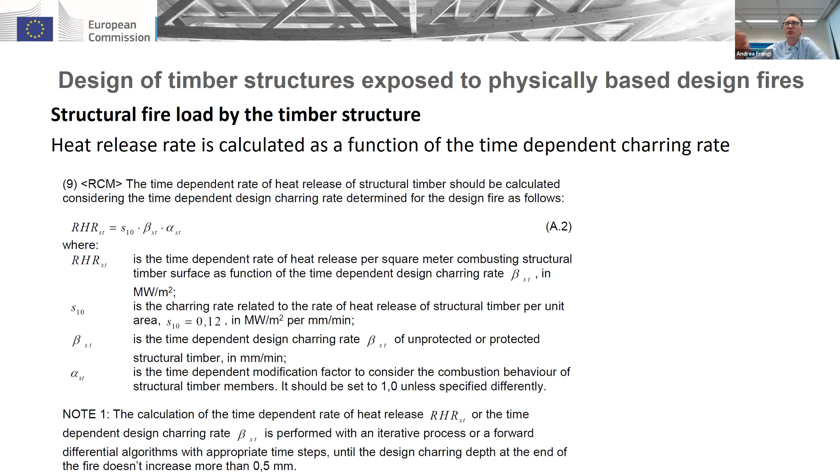And the alpha factor considers exactly this storage effect. Some energy is kept in the char layer and released later. And about this factor, there is ongoing research. Daniel Brandon is showing, based on analysis of large tests done now in North America, that it is in the range of 0.3, 0.4. We are able to show that the value can also be higher, especially in the cooling phase. At the moment, we just set it to 1, in a conservative way. We expect that in the future we are able to give this value for typical situations. But as I mentioned, there is still ongoing work. The good thing is that by 2025, we hope to have an improved version of Annex A.

How to calculate the charring depth? Here we go back to the model proposed by Norman Werther, the cumulative temperature charring model. With this, you can estimate the charring depth. And then, of course, for the design, at the end of the day, we go back to the effective cross-section. And again, the zero strength layer is not a constant value anymore. There is this modification with another factor, alpha Fe, as a function of whether you are in the fully developed phase, the cooling phase, and so on.

We try to give something, and this is, I think, a challenge, but I think it's important to give some advice to engineers, better than nothing. But of course, I think this is the highest level. There are colleagues saying, please don't do anything in standardization. We understand this point, but I think to give a framework, to give some advice, is already a good thing. And here, of course, we expect possible improvement in the future.

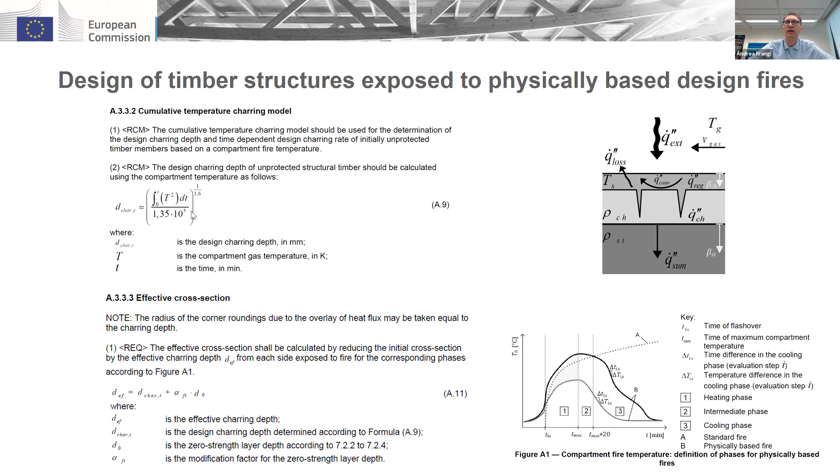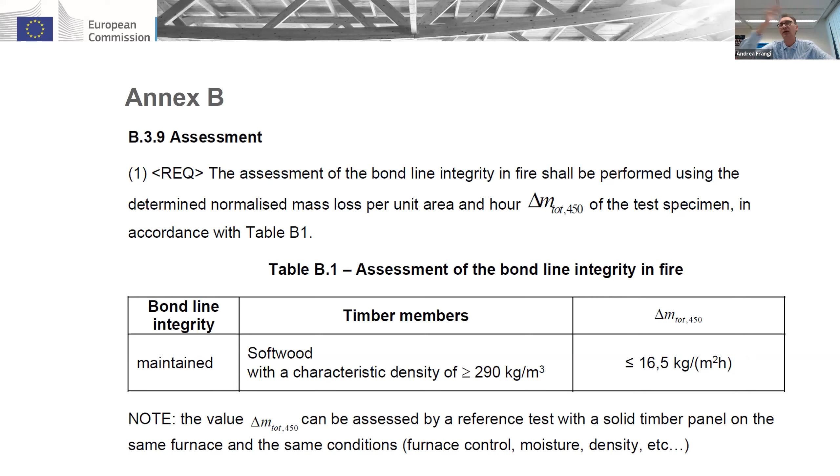I'm very sorry, the idea was 45 minutes, now it's 1 hour, but this is my last slide.

I hope that you get a feeling for the new Eurocode. We really try to improve the current Eurocode. We have the new European charring model, which is not completely new, but we really try to have a systematic way to present the different influence factors and so on. We have, of course, the new information about the failure time of fire protection systems. For the effective cross-section method, I think we now cover more or less the most important timber elements: CLT, timber concrete composite, which I didn't mention due to time constraints. We have revised rules for timber frame assemblies. For connections, I think the most important thing is extending the knowledge up to 2 hours.

We have revised the important rule for detailing, and we are really working on the topic of designing timber structures based on physically based fire. We have the new Annex A, and this will be, I think, improved again in the next year.

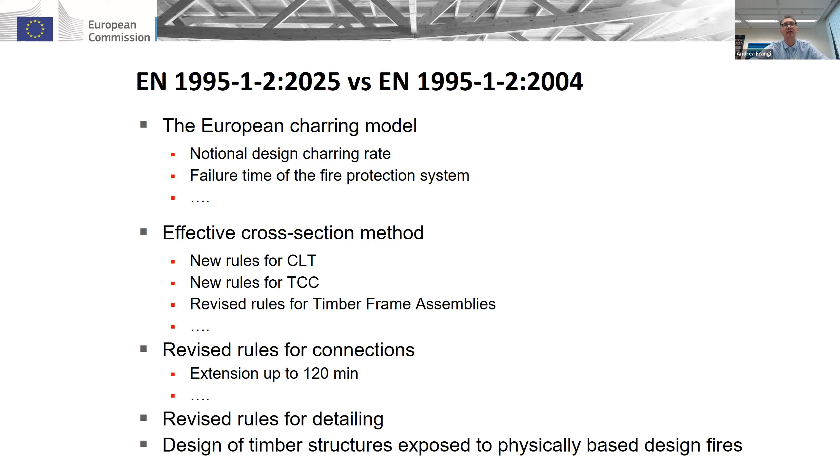Doing standardization, I know, for example, Andy knows exactly what I mean. It takes time. You need a lot of discussion. You need the consensus. So it's really a long journey, but we are happy. We have been doing this for 25 years, and we hope that the new generation of the Eurocode, especially also for timber, will help us also in designing these kinds of buildings.

I mean, we need timber in buildings also for climate change and so on. It's good if we use more timber for buildings, and for this we also need a good Eurocode, at least in Europe.

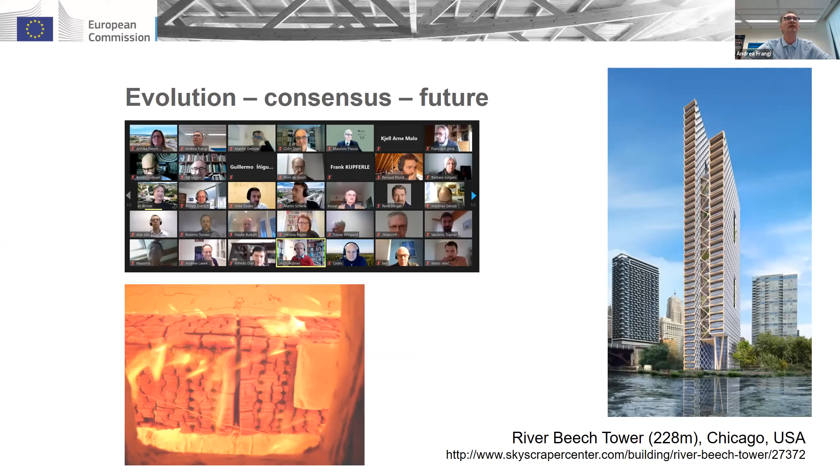Andrea, thank you for your presentation. Really thorough and interesting and full of insight. So we are having some questions from the attendees. I'm going to start by reading some of them. So one of our attendees is wondering if the latest draft of the document is already available as a public document or not?

Yes, yes. The latest draft is available on my computer. At the moment, the latest draft is going into the first informal inquiry. So all national bodies received the document. We started this last Monday. For 2 months, the national bodies are commenting. And all members get this document, and national bodies can spread it. I don't have any problem.

If somebody wants to have the document, I can give the document in a confidential way. The problem is you cannot use it. There is no legal basis. We always say you cannot use it. You cannot design, unfortunately, a building based on a draft. At least you have the full responsibility and the authority must accept.